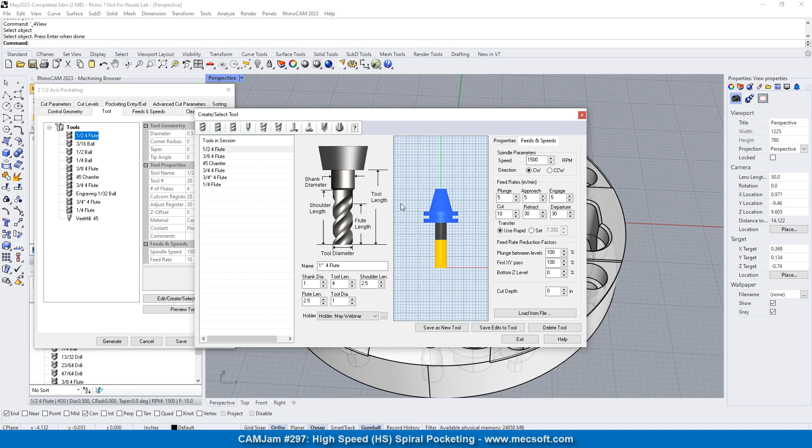Okay, 1 inch. And we'll change this to tool diameter of 1, shank diameter of 1, the same flute length, same shoulder length, same tool length. Everything else is going to be the same. And we're going to pick Save as New Tool, Exit.

So now we've got the 1 inch, and we're going to go to the cut parameters, the tolerance, change this. This is actually going to be a roughing and finishing at the same time. So we'll have a tolerance of 0.001, a stock of 0.

We're going to do a high-speed cut pattern. And in the high-speed pattern, it's going to start at the center of the geometry, which is the center of our hole, and then it's going to spiral outward.

So let's go ahead and leave the step over set at 25%. We'll do a cleanup pass.

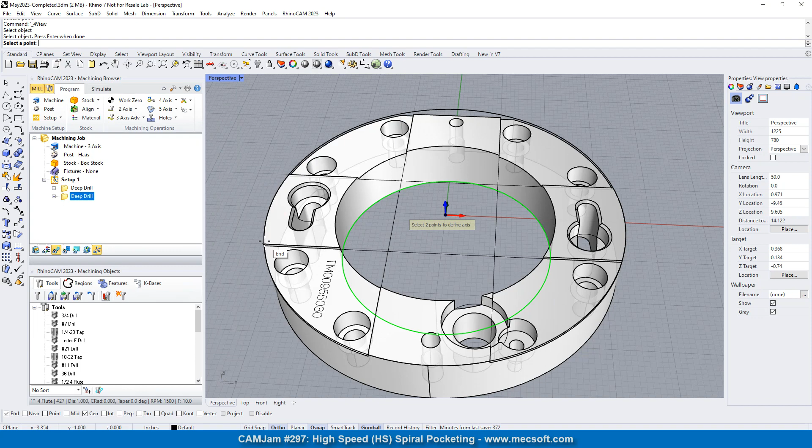Okay, for the cut levels, the location of the cut geometry is at bottom. And for the total cut depth, we're going to just go ahead and pick 2 points, since it's 1 1/16. For the depth per level, we'll just go at 1/8 of an inch.

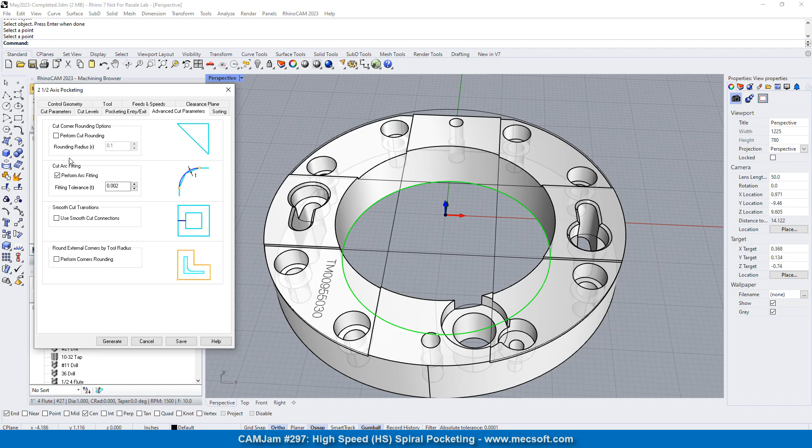And for the entry, it's going to be a path. So what's going to happen is it's going to enter in a helical motion, and when it starts cutting, it's going to start expanding outward till it gets to the perimeter. Okay, so let's go ahead and fit arcs. Okay, let's go ahead and generate that.

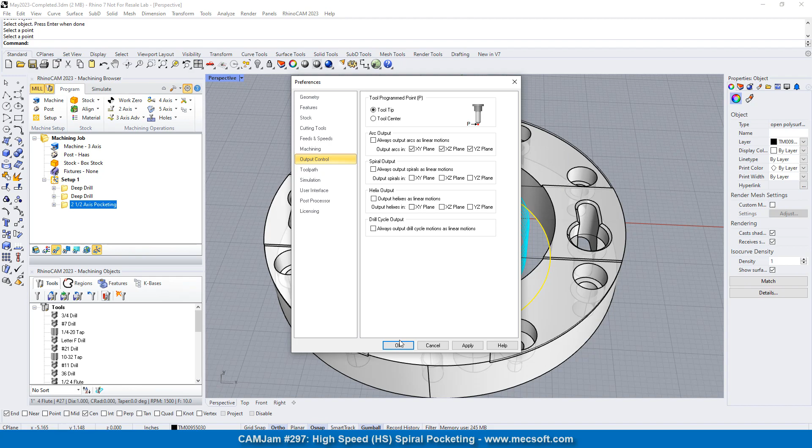Okay, we don't have any arcs, so let's go ahead and see why we're not having arcs. Let's go into the CAM preferences. Go to output control. You want these boxes unchecked if you're going to output arcs and helixes. So pick OK, and then we'll regenerate.

Okay, so now we have dark blue motions, which are circular arc motions. So let's take a closer look at this. You'll see that it's a circular entry motion or a helical entry motion, and then when it engages, it's just one continuous high-speed radial motion.

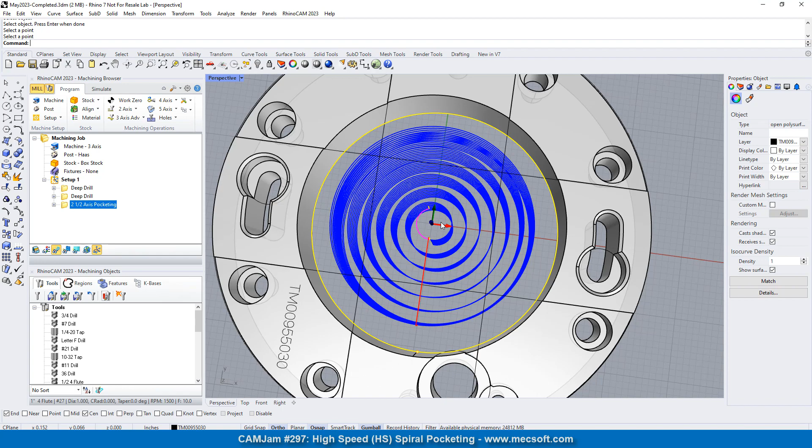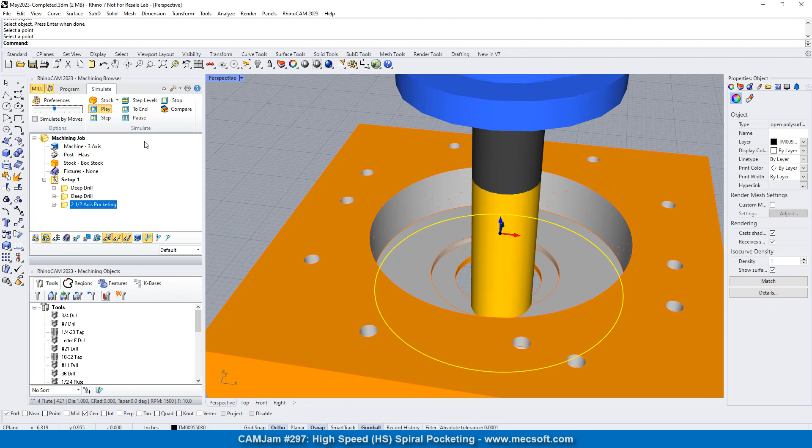Okay, so let's go ahead and simulate that. Okay, we got that hogged out or finished out. Let's go back over to the Program tab. Now,